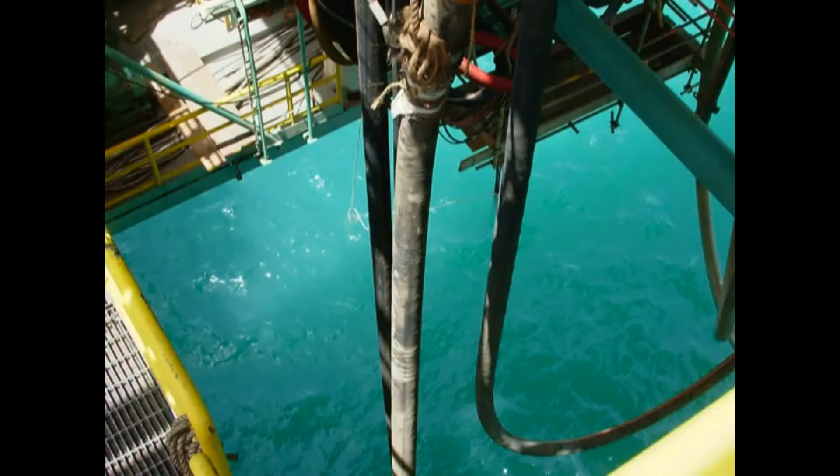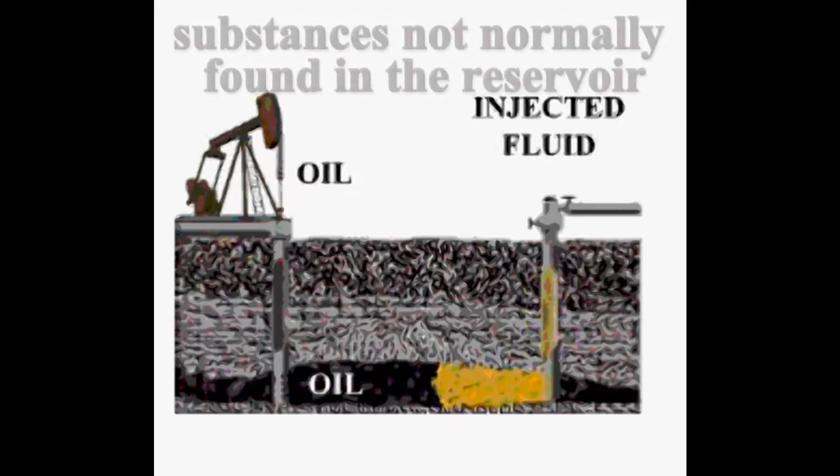Now let's discuss recovery methods using substances not normally found in the reservoir. There are several. The first is thermal recovery.

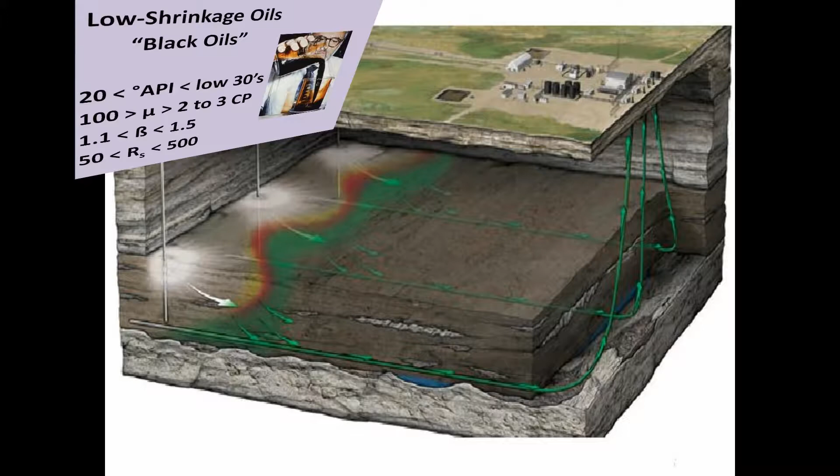It is preferred for heavier oils, especially oil with about 20 degrees API gravity or less. These heavier oils also usually require a secondary recovery mechanism earlier in the production cycle than lighter oils. In thermal recovery, heat is injected into the formation, reducing the viscosity of the oil, allowing it to flow more readily into the producing well. As in water flooding, injector wells must be drilled, increasing costs. Instead of water, though, heat is injected into the well. In certain conditions, however, that heat can be created in the reservoir itself.

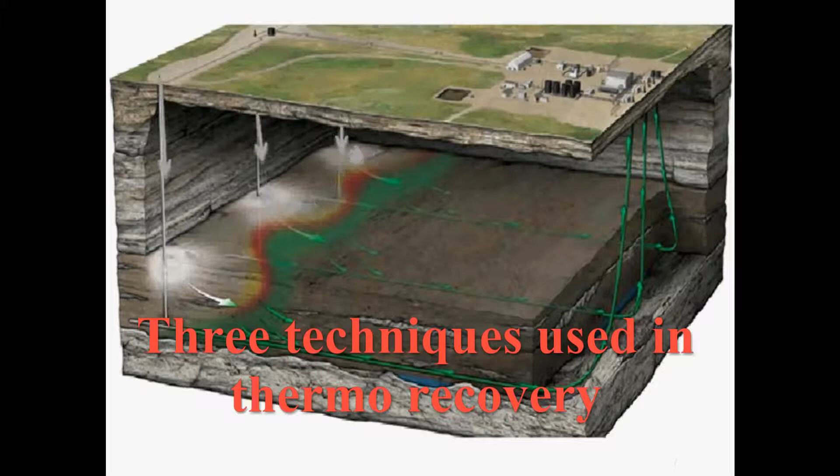There are three techniques used in thermal recovery. Some are more successful than others, but each offers specific benefits.

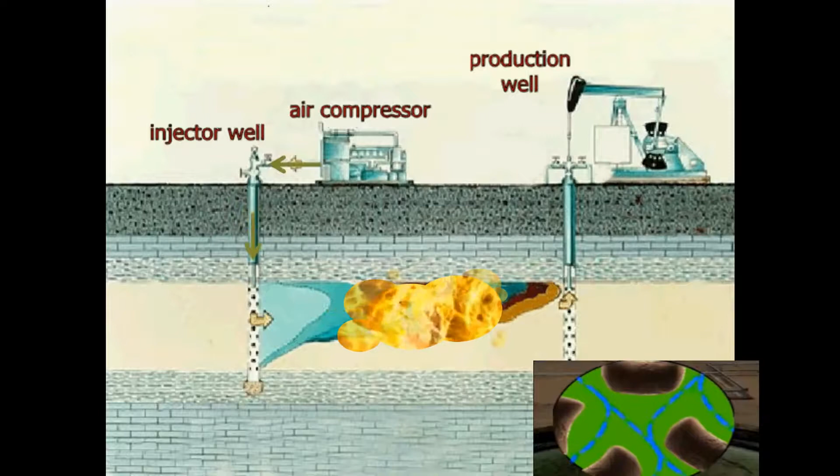In the first technique, called fire flooding, a compressor at the surface injects air down into the injector well, providing oxygen to ignite the oil in the formation. The fire is controlled by how much oxygen is injected. The heavy crude oil is heated by the combustion of these hot gases, thus reducing its viscosity. This method is only partially successful because the colder, heavy oil located away from the burning heat source persistently resists flow and can even block the flow of the heated oil into the well.

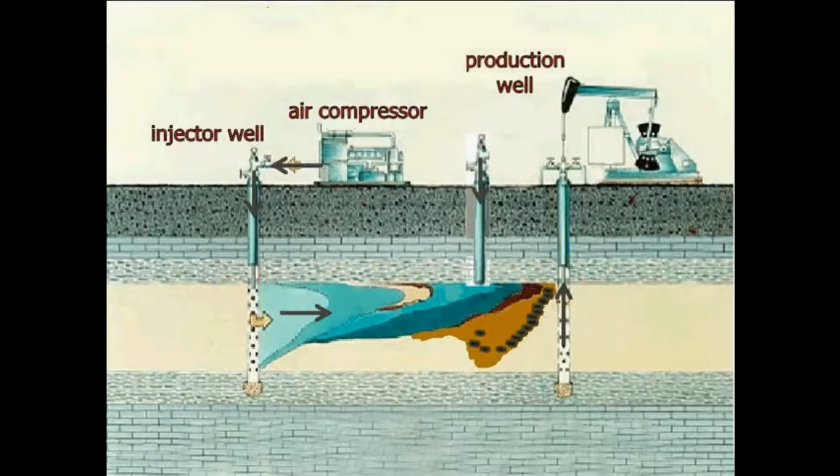Additional injector wells can be drilled closer together to reach these cold spots, but this can prove to be a poor economic solution because this method consumes the oil itself and reduces it to useless char. Fire flooding is considered a final recovery method.

A more efficient mechanism in thermal recovery is called steam flooding. In this technique, steam is generated at the surface and injected down into the formation. As the heavy oil is heated, the steam cools and condenses into hot water that is then allowed to soak into the oil near the injection well. This heat reduces the viscosity of the soaked oil, which can now be pushed toward the producing well. The cooler, heavy oil, away from the heat source, however, is not affected and may impede the flow of oil.

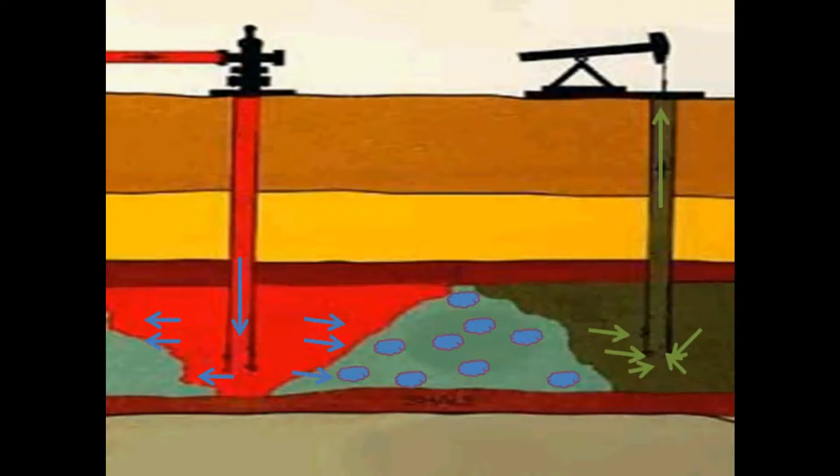Steam flooding can be very successful in shallow reservoirs where numerous injection wells can be drilled economically.

The most efficient and therefore the most successful form of thermal recovery is called cyclic steam flooding, or huff and puff. Here, a well will operate as both an injector well and a producing well at different times in a cycle, thus the name.

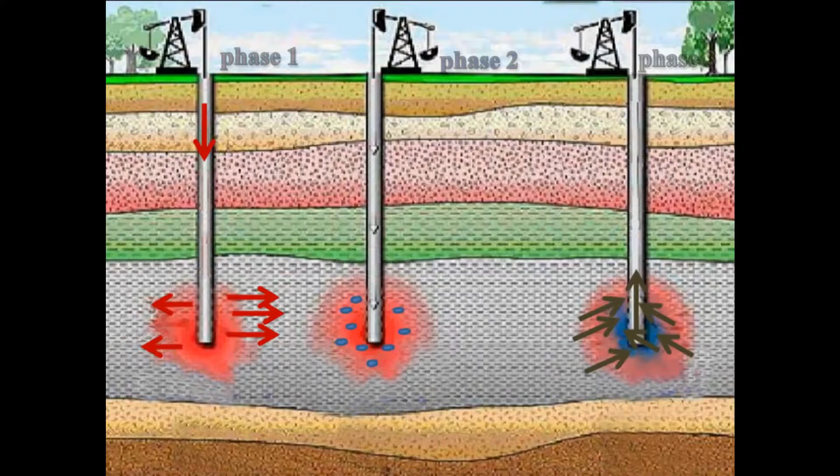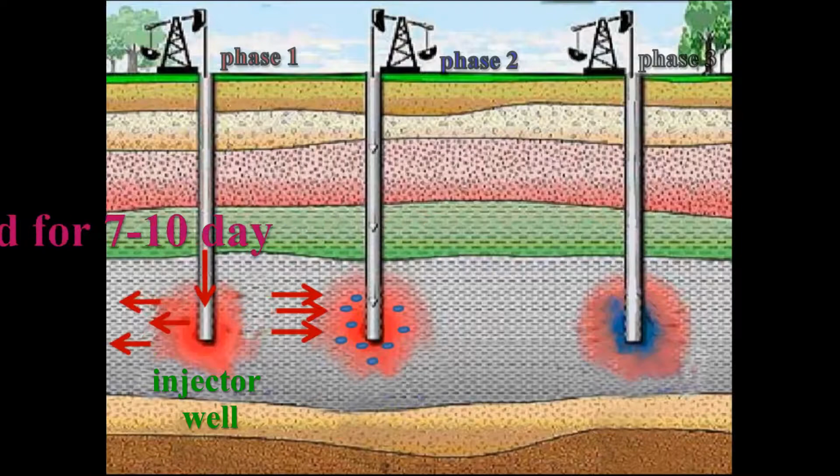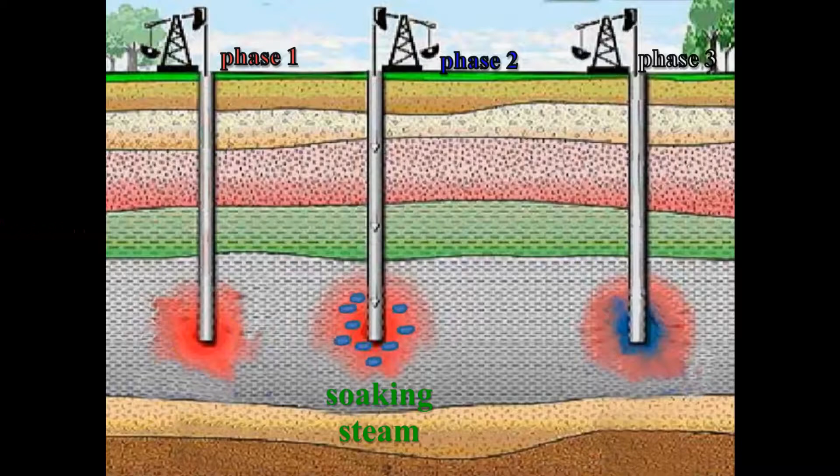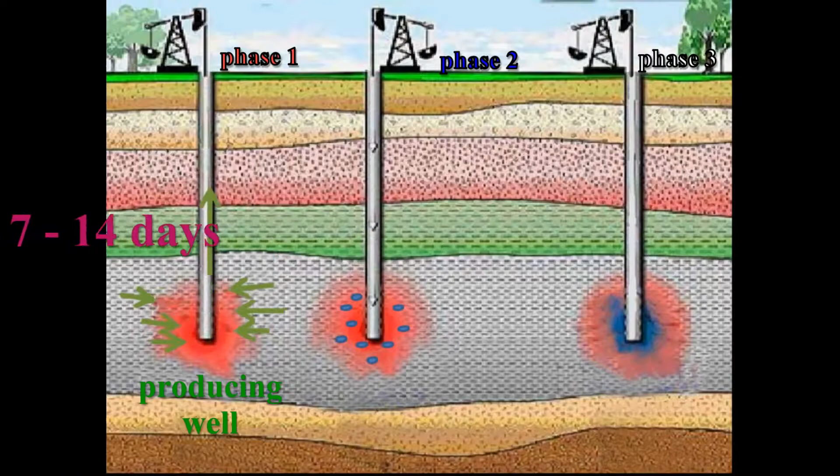In an injector well, steam is injected into the formation over a period of 7 to 10 days. Steam injection is then stopped for a few days, allowing the steam to cool to hot water and soak the oil around the injection site. When deemed ready, the injector well now becomes a producing well for 7 to 14 days, pumping out the less viscous heated oil. After pumping out this heated oil, the producing well becomes an injector well and the cycle begins again.

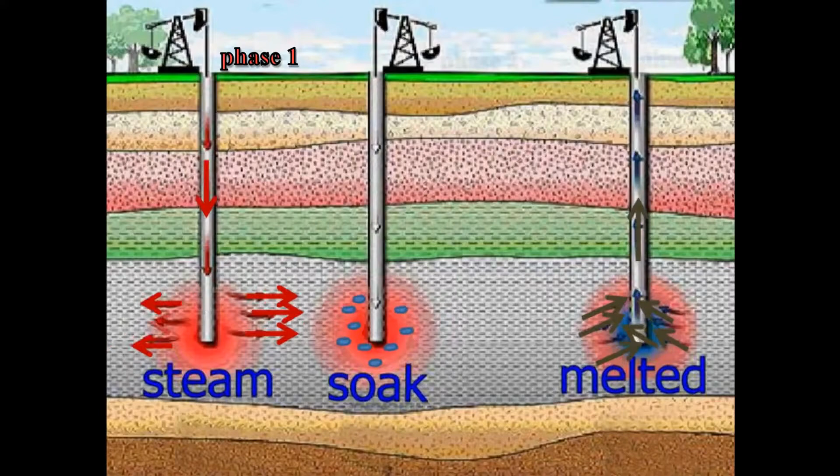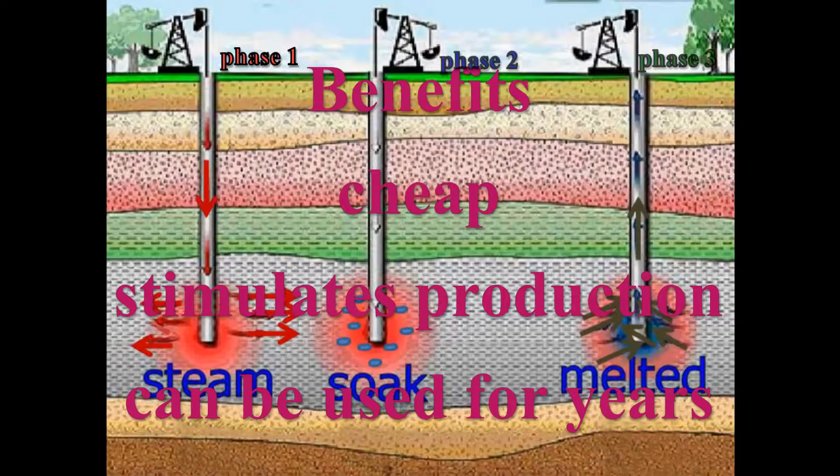The advantages of using cyclic steam flooding are many. It is considered a relatively cheap technique because it does not require drilling a large number of tightly spaced wells, and it sharply stimulates production. Because cyclic steam flooding can be used to produce a well for years, it is an excellent secondary recovery mechanism for heavy oil.

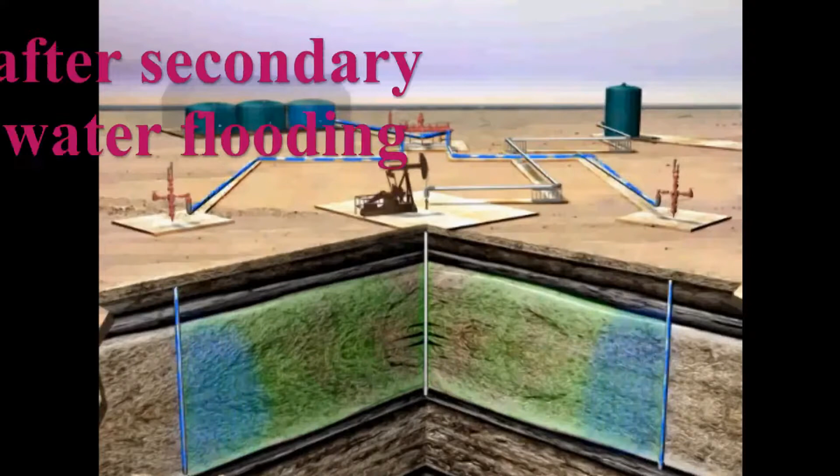Miscible flooding is another secondary recovery mechanism. Usually applied after primary depletion and secondary water flooding have already been used, miscible flooding is more commonly used as a tertiary recovery mechanism.

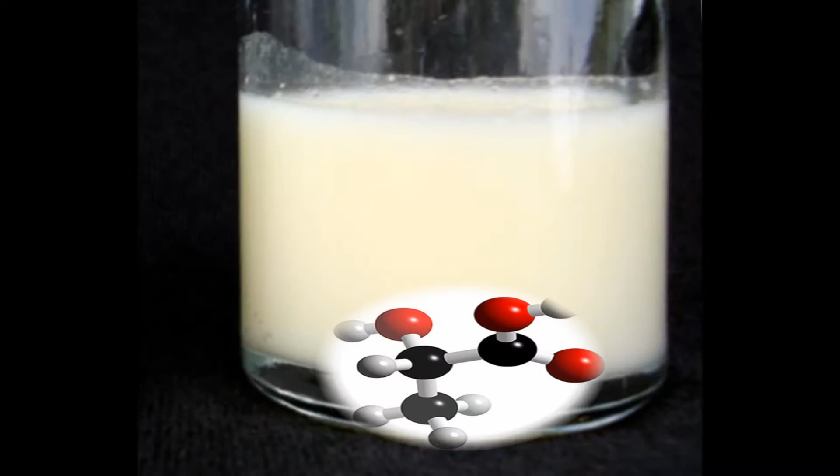If you remember from your chemistry, a miscible fluid mixes with another liquid to form a single homogeneous substance, like water mixes with milk. This mixture does not change the molecular structure of milk, it just dilutes it or makes it watery. Miscible flooding depends on using a fluid that mixes with oil. This fluid does not change the hydrocarbon molecule structures, it just dilutes the oil, making it less viscous. By the way, fluids that do not mix with oil, like water, are called immiscible fluids.

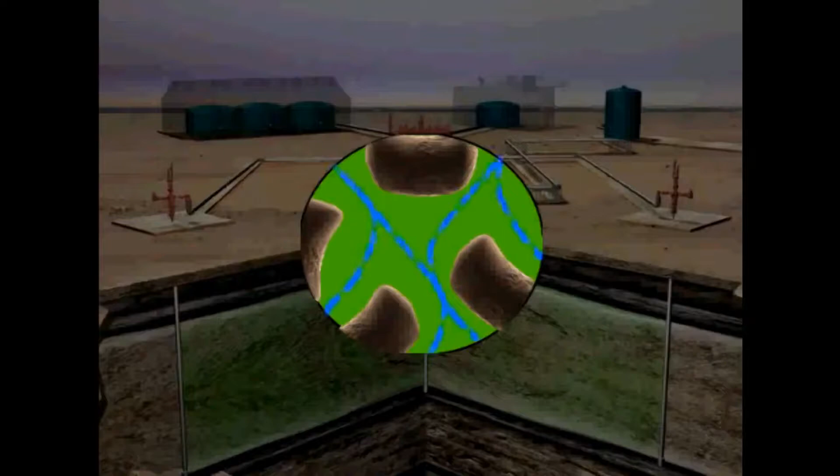Utilizing the miscible flooding mechanism, a reservoir is flooded with a fluid that is miscible. This fluid causes changes in the reservoir fluid characteristics. For example, it can lower the oil's viscosity. This, in turn, allows the miscible fluid to penetrate more deeply into remote recesses of the reservoir, lowering the trapped oil's viscosity and thereby allowing the oil to flow more easily.

Carbon dioxide, CO2 gas, is an example of a miscible fluid with oil. It is used effectively in miscible carbon dioxide gas flooding.

CO2 can occur naturally in the underground reservoir along with the hydrocarbon gases. When using CO2 in miscible flooding, it is either harvested at the well site or transported from another area by pipeline. The CO2 gas is then injected under pressure into the well.

Once injected into the reservoir, the CO2 mixes with the oil, causing it to expand while lowering its viscosity. CO2 works best when used alternately with a slug of water, because the water helps keep the CO2 moving evenly across the formation.

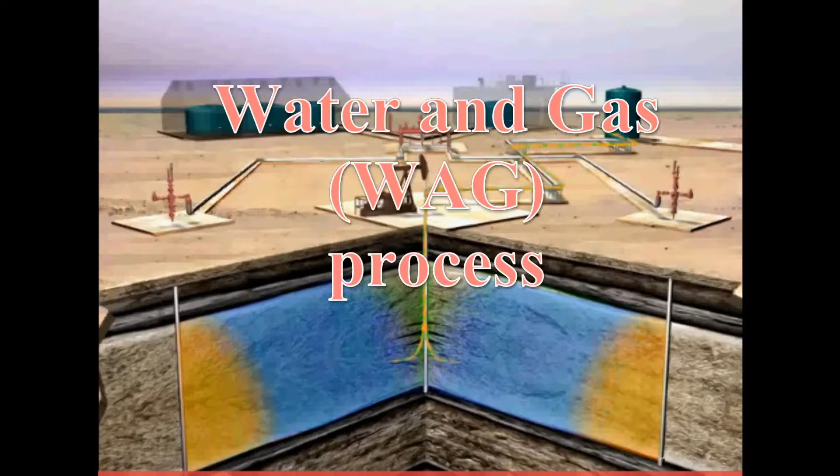This is referred to as a water and gas, or WAG, process. Using the WAG process improves the sweep efficiency because more of the reservoir rock is in actual contact with the advancing gas being pushed by the water.

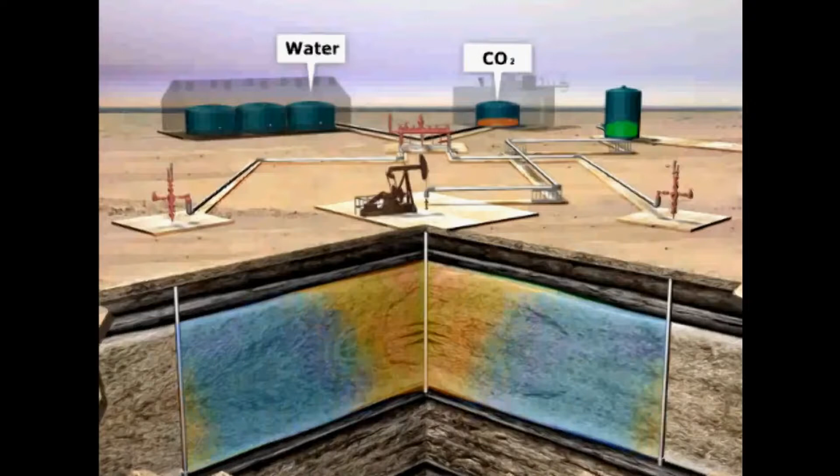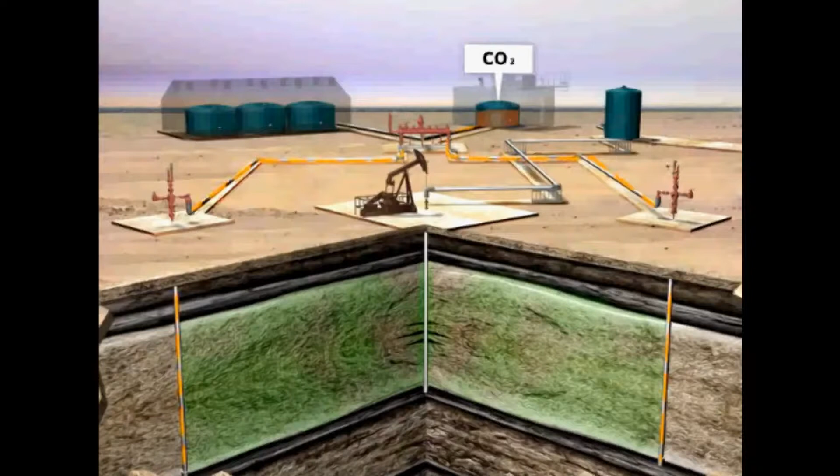The major expense in CO2 gas flooding is the investment in the surface facilities needed to separate CO2 from the hydrocarbons. Fortunately, once the CO2 has been separated from the other gases, it can be compressed and re-injected back into the well, allowing for a continual process.

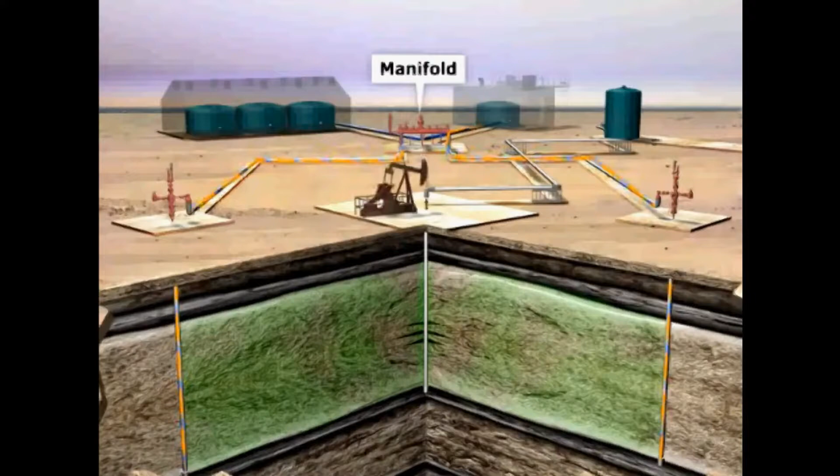In addition to CO2 gas, there are other effective miscible fluids. Among these are liquefied petroleum gases, or LPGs. Although resulting in high recovery, using LPGs is usually too expensive, especially when the LPG market price is high.

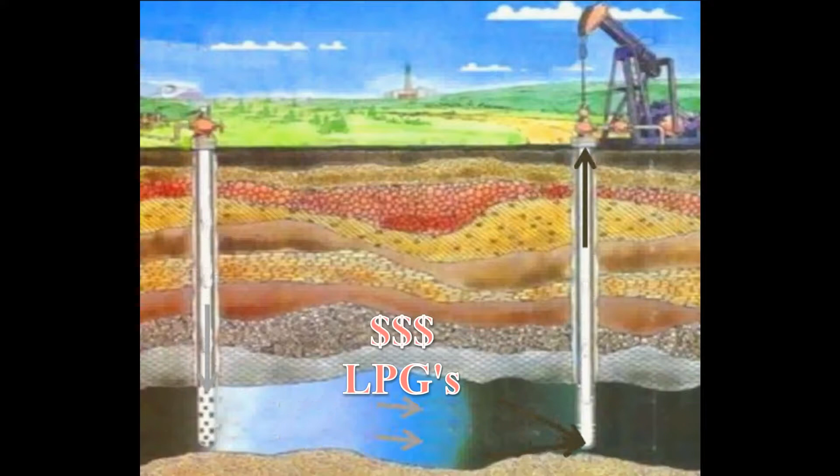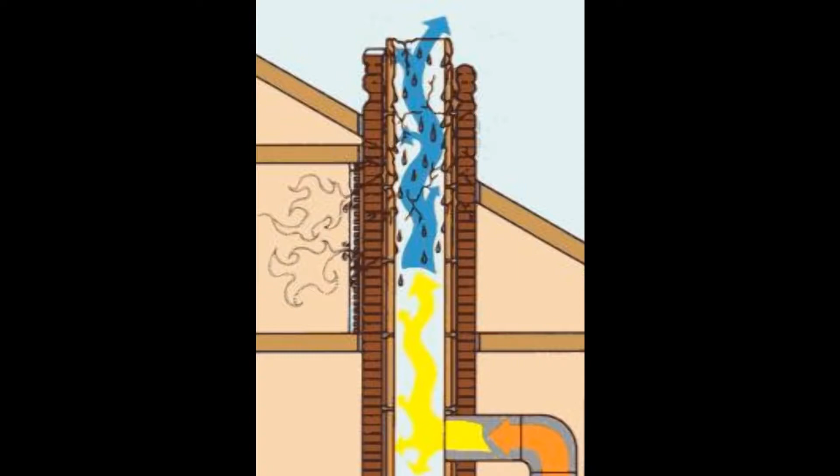Flue gases can also be used. Flue gases are waste gases released in industrial processes using oil, gas, or coal. Being able to efficiently use flue gases in miscible flooding is limited because most of these flue gases are not readily available.

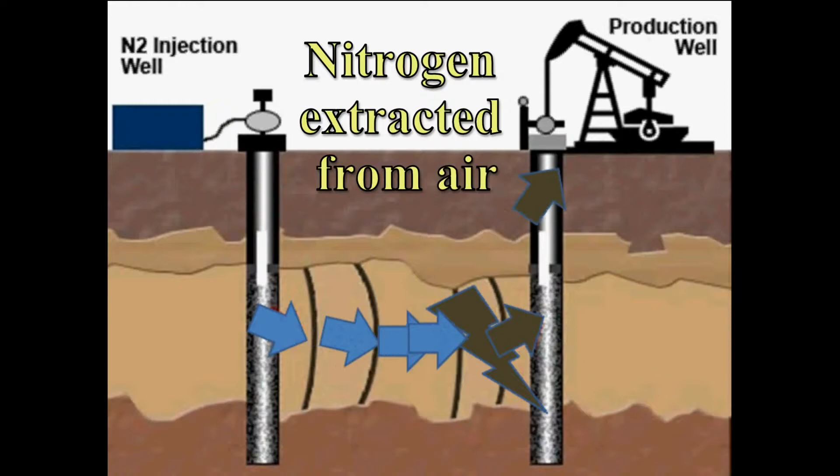Nitrogen extracted from air can also be used in miscible flooding. However, nitrogen is only miscible in deep reservoirs with very high pressures.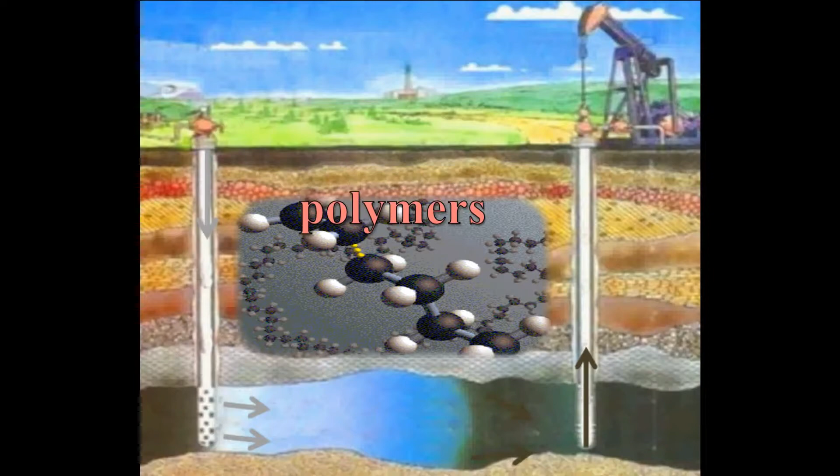Mobility ratio is a fourth type of secondary recovery mechanism. Here, polymers, long-chain chemical substances, are injected into the well and help reduce the friction or surface tension between the water and oil molecules and the rock surface.

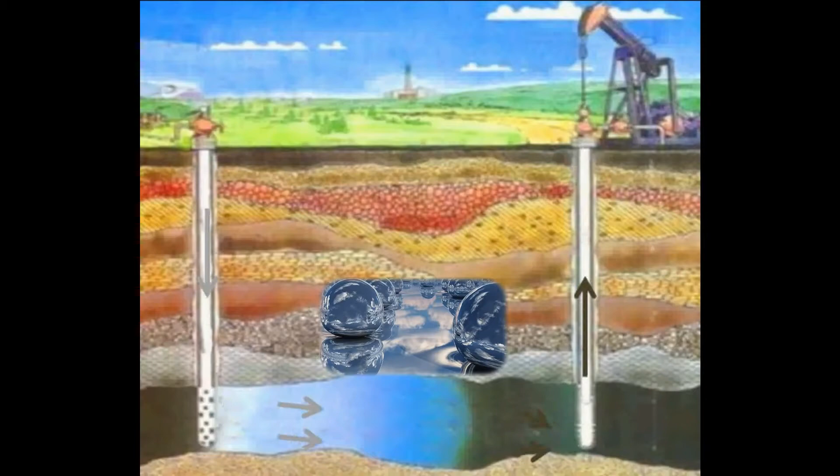Polymers have shown promise when coupled with water flooding. Water injections into the well are alternated with injections of water mixed with polymers. The high cost of polymers limits the economic feasibility of using this method.

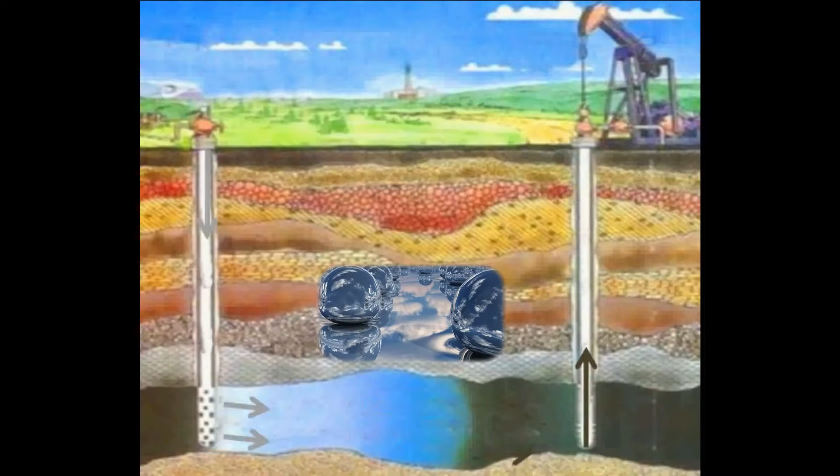The fifth and last secondary recovery mechanism to be mentioned here is the microbial flood. This process can be very useful under certain conditions. When using this mechanism, crude oil-eating bacteria are injected into the well.

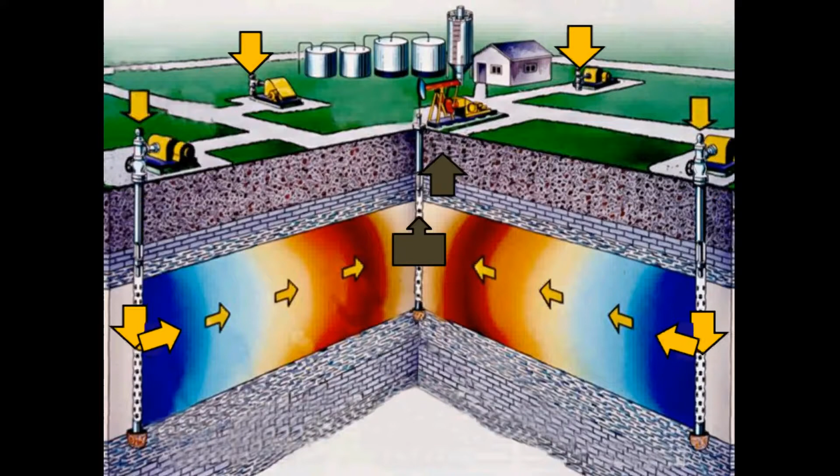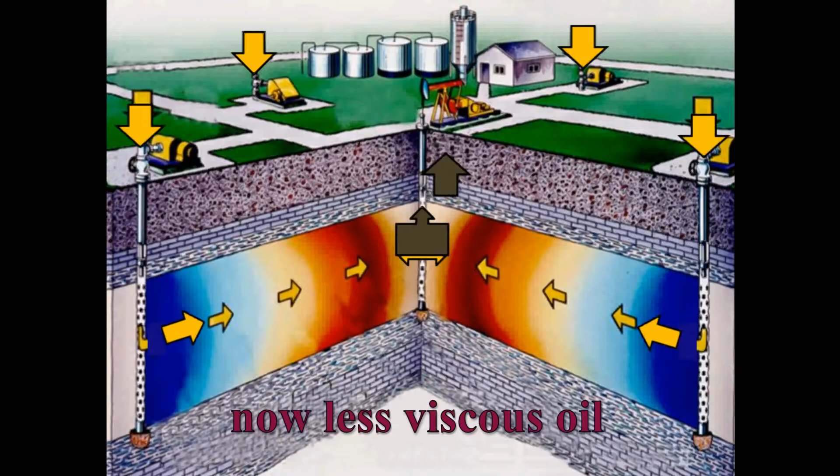As these bacteria consume the oil, they produce a byproduct called methane gas, which is very miscible. As this methane gas is released from the bacteria, it creates pressure which pushes the less viscous oil out toward the producing wells.

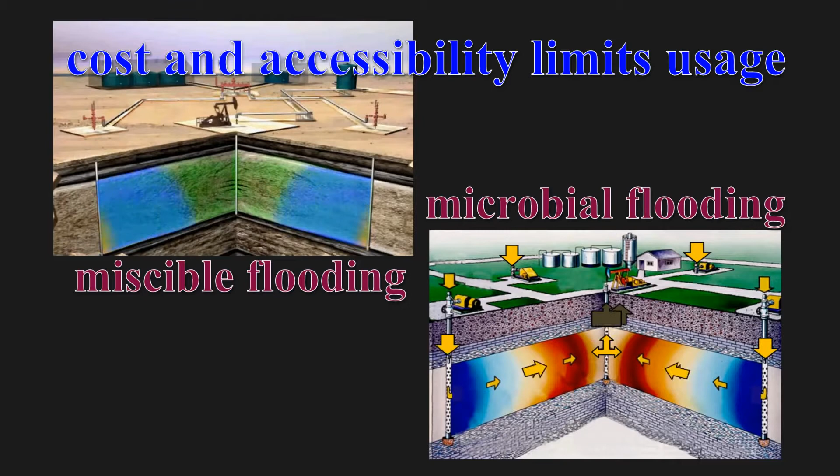As you can see, using miscible and microbial flooding in a secondary or tertiary drilling plan can have high recoveries. Each has advantages and disadvantages. However, because of their cost and accessibility, their use is limited. Currently, a lot of research is focused on finding ways to improve these technologies.

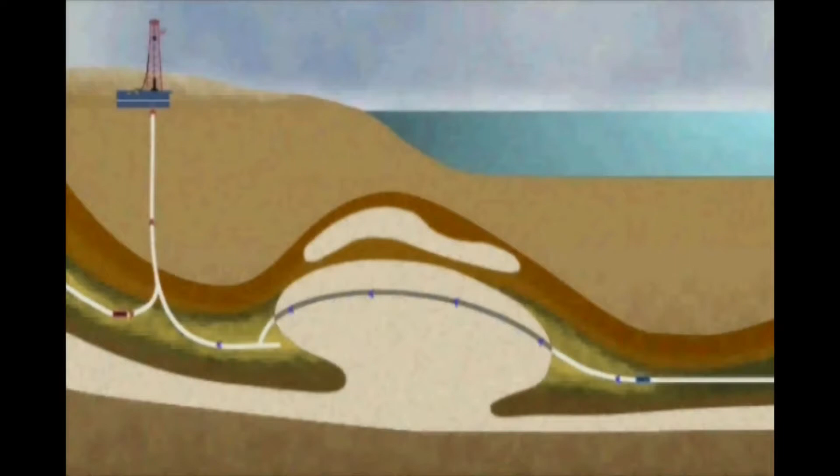So let's review. We have many different drives or types of energy used to push hydrocarbons to the surface. These drives can be the Earth's natural sources of energy, like water, gas, gravity, or compaction.

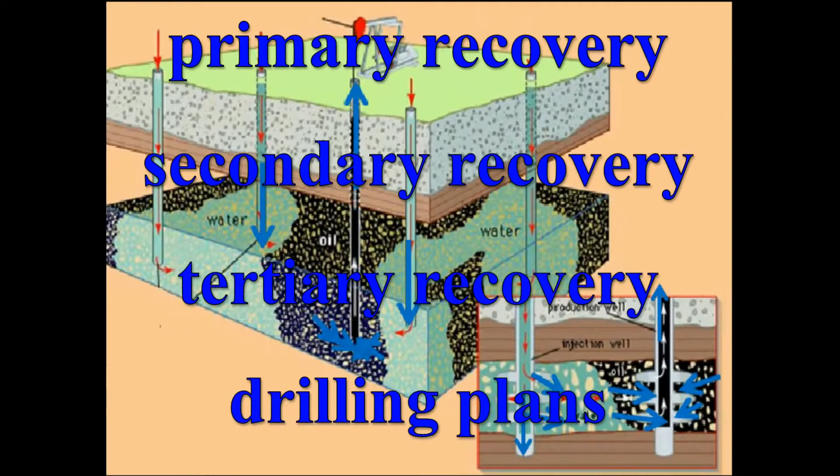They can also be man-made or man-harnessed, like water flooding, thermal flooding, miscible flooding, mobility ratio polymer flooding, or microbial flooding. Whether used in primary, secondary, or tertiary recovery drilling plans, these drives allow us to get high volumes of hydrocarbons to the surface cheaply and efficiently.

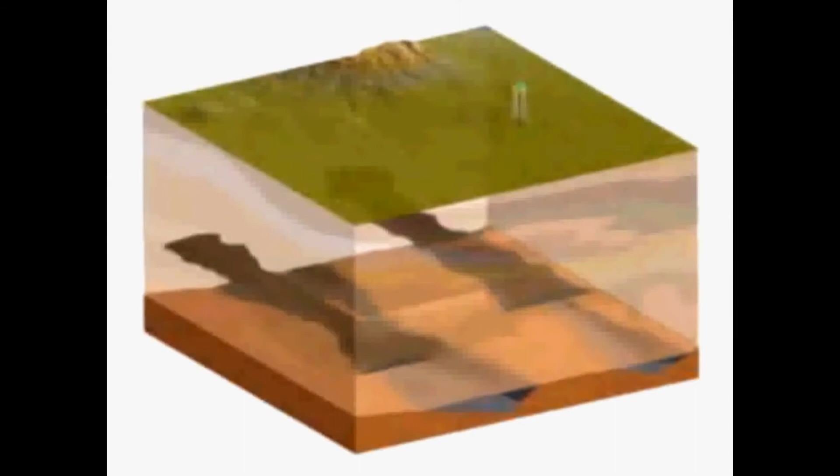Now let's turn our attention to another important task for reservoir engineers. They must calculate as accurately as possible how much recoverable hydrocarbons are in the reservoir. These numbers are extremely important because they determine the future developments of the reservoir based on the value of its assets. But what are these assets or reserves?

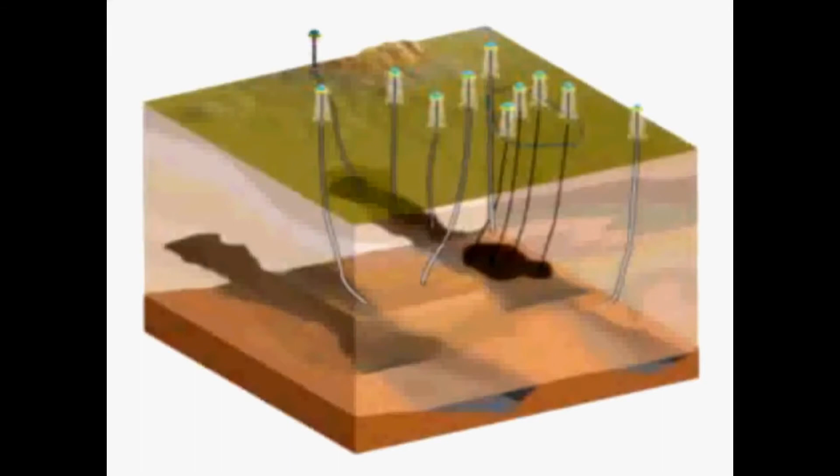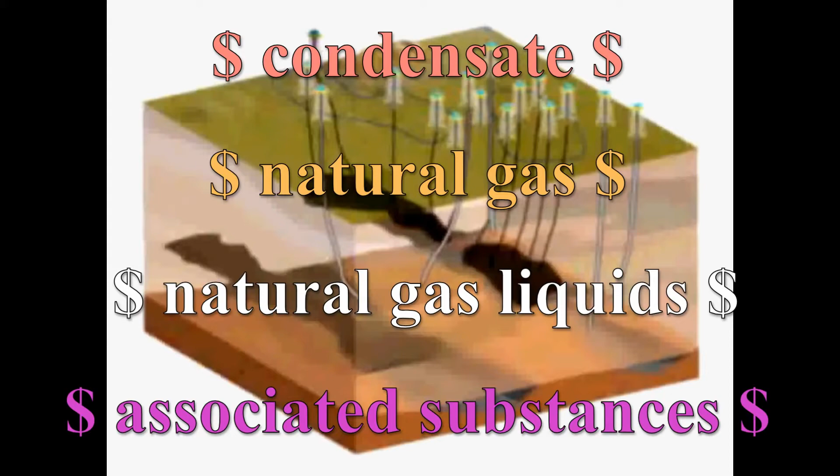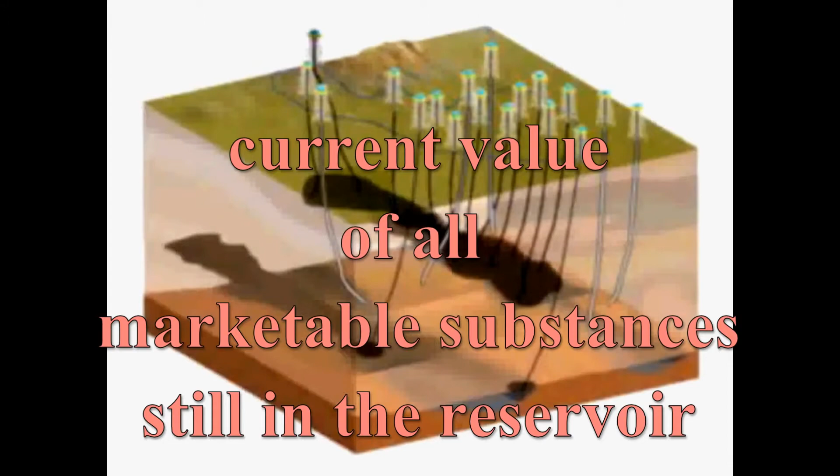Defined by the Society of Petroleum Evaluation Engineers, SPEE, reserves are estimates of the volume of crude oil, condensate, natural gas liquids, and associated substances thought to be commercially recoverable in the known accumulations of oil in the reservoir from a given date forward. In other words, reserves are the current value of all the marketable substances in the reservoir that has not yet been produced.

Oil companies want to be assured of how much production of the different petroleum products they can expect before they continue investing more money. In arriving at an amount accompanied by the value based in dollars, the current value of hydrocarbons is based on the price in the marketplace.

In addition, they also calculate the costs of adhering to existing governing regulations and the cost of extraction based on current technology. These reserve estimates are used to determine the potential value or wealth of an oil company.

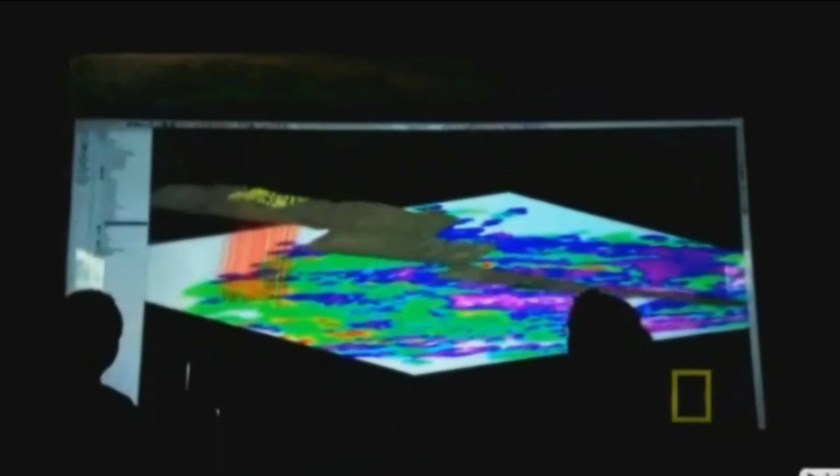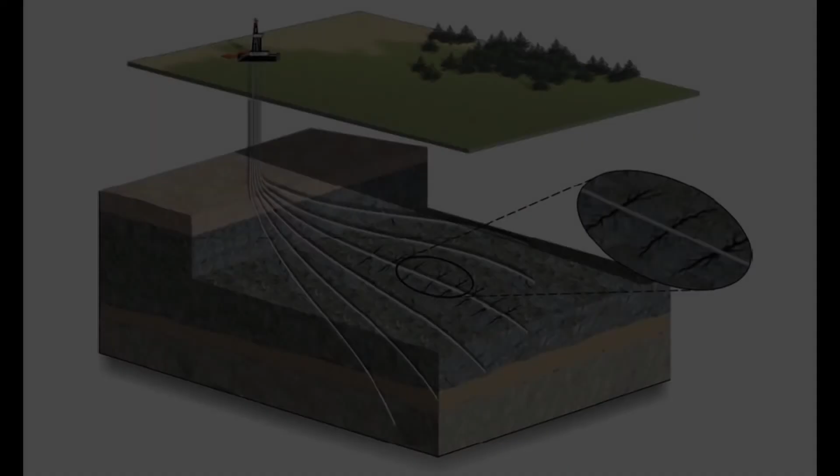Remember that since oil reserves are hydrocarbons still in the reservoir, their recovery rates can only be estimates. In ascertaining how much oil can be recovered, however, assumptions and estimates can be made with the full understanding that they are based on considerable uncertainty. The future market price and advancements in technology, for example, can impact these projections significantly.